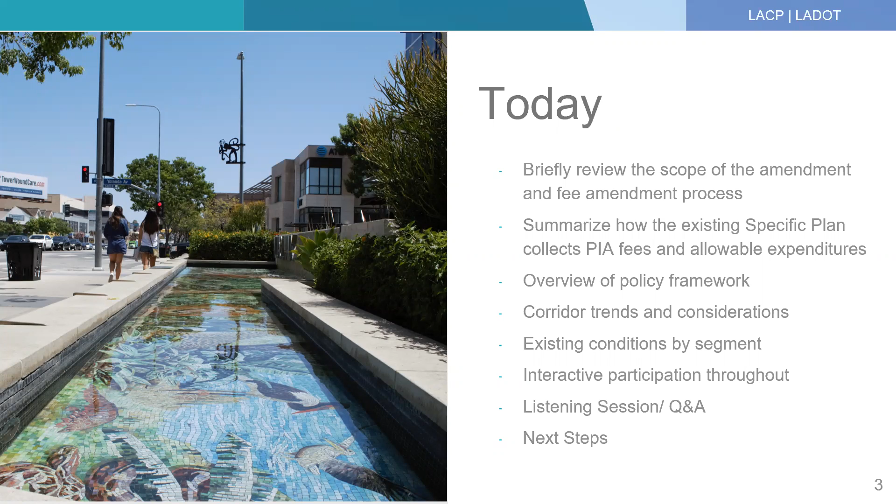The purpose of the meeting is to see what you, the community, wants us to consider for allowed expenditures for updating a fee that's collected in the specific plan area. We're at the part of our work program where we're getting feedback from you, the public, to help inform how the project impact assessment fees should change. We're discussing the proposed changes that you would like to see and listening to you.

The rezoning portion has moved to the community plan update. As of August 2021, in order to speed the corridor's post-pandemic recovery, we delegated the rezoning portion of the work program to the community plan updates already underway in the Southeast and Southwest Valley. This approach will use the city's resources more effectively and support community by community zoning that respects each neighborhood's priorities and allows for the zoning standards to change as appropriate.

The third part, to discuss the project impact assessment fees, is what brought us here today.

Before we go into further detail about what this update means, though, we want to provide quick clarification about how the collected fees apply in the corridor today.

We need to distinguish the difference between the public right-of-way in contrast to individual lots. The right-of-way includes the sidewalk, street, curbs, and gutters, all the land that is public and a common good. In contrast, individual and mostly privately owned lots that line the corridor is where most of the development occurs.

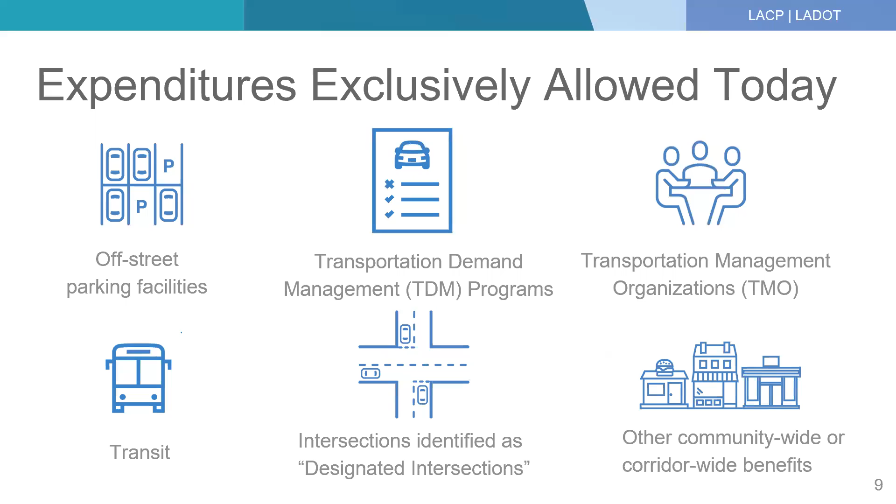There's an option to put the money towards other things with an involved process, but the really big expense has been intersection improvements. There were 19 identified intersections, and 12 and a portion of another have already met the improvement.

These are some of the most clearly defined because transportation demand management and transportation management organizations were not well defined, and therefore that's where most of the money went.

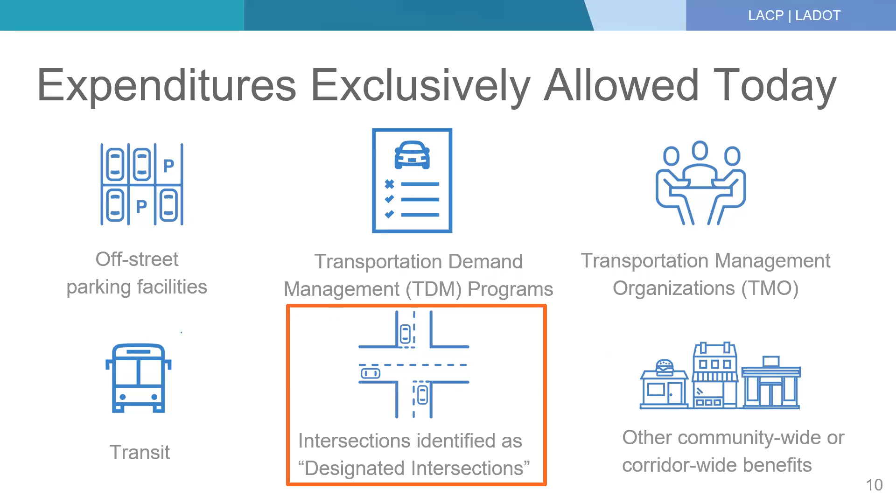But before we start sharing the data we've gathered, we're going to talk for a moment about some guiding policies. We're going to share some things in the existing specific plan. We're also going to discuss how things have changed policy-wise since the adoption of the plan in 1991.

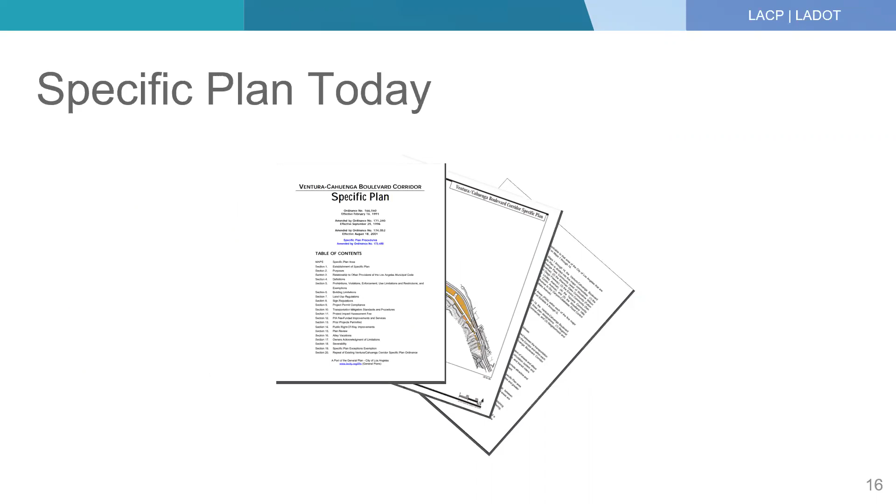We're going to highlight some of the language in the purposes section of the specific plan. Some of these highlighted purposes, as old as they are, still align with the policy direction of today, which we'll discuss in a minute. Of note, though, some of these purposes, while well-intentioned, never fully addressed the specific plan, nor were they adequately funded.

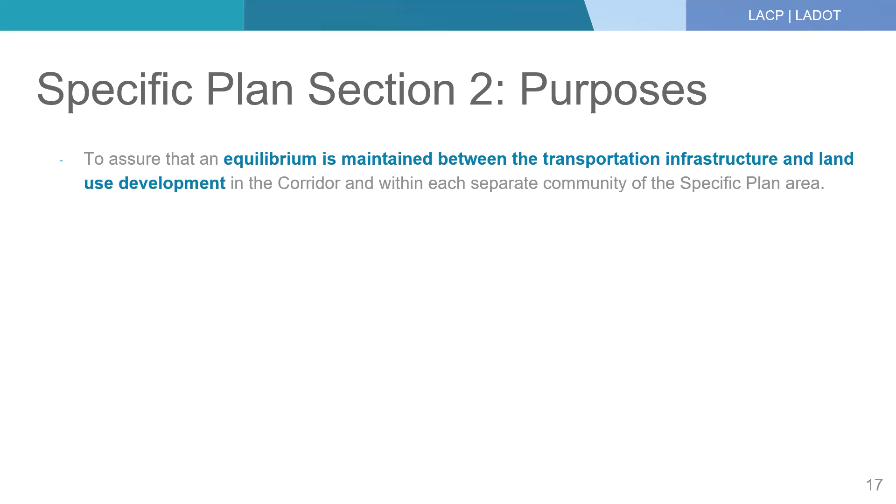The purposes of the plan talk about transportation infrastructure, effective circulation that reduces conflict with motorists, creating attractive pedestrian environments that encourage pedestrian activity and reduce traffic congestion, encouraging pedestrian activity with attractive and active environments, and even alleys because they're part of the transportation system.

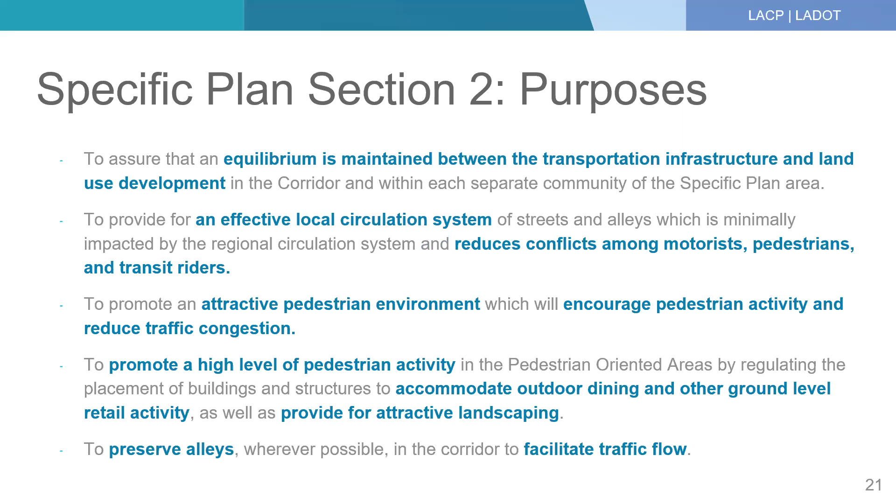However, since 1991, many other things have also changed. We're going to start with some citywide ones. A few years ago, we updated our mobility element, which was formerly known as a transportation element. We did this because we updated our approach to transportation. We started to think about mobility for all users.

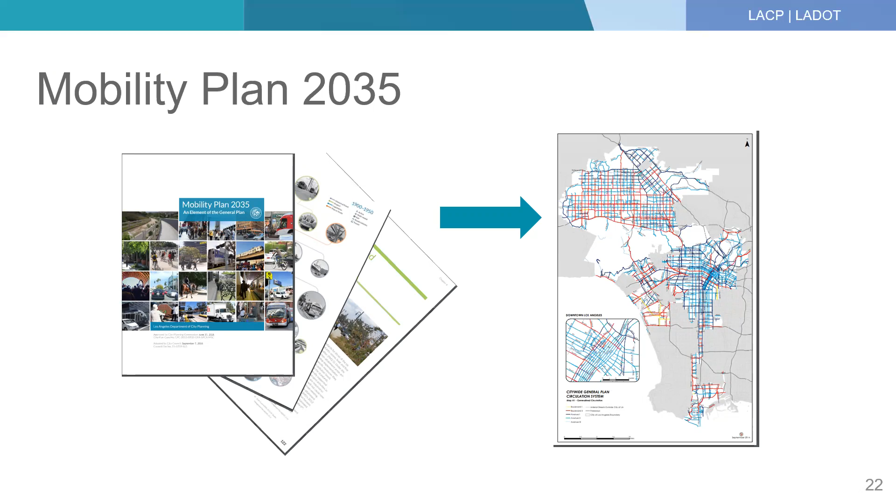In the 2035 mobility plan here, you can see a snapshot of the mobility circulation system map. The entire Ventura-Cahuenga corridor is designated Boulevard 2 in the mobility plan, and this designation provides standards for the width of the streets and sidewalks.

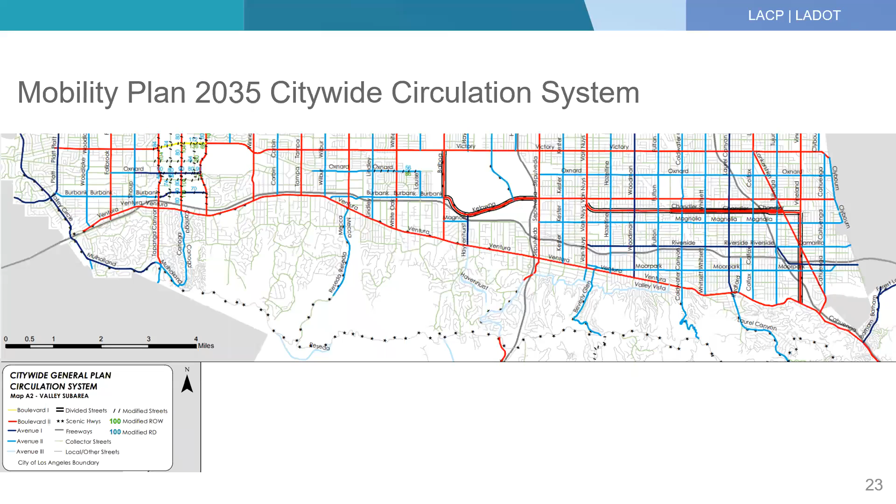The shift from auto orientation is also in part because we started thinking about the cost of accidents in vulnerable populations. On average, 36,000 or more Angelenos are killed or injured in motor vehicle collisions per year. That's about 100 per day. And the fatality rate is doubly high for our youngest and oldest residents.

Vision Zero is an international movement that tries to prevent the loss of life. In August 2015, Mayor Garcetti launched a local Vision Zero initiative by issuing an executive order that makes human life the top priority in the design of our city streets. The executive directive includes two specific goals: to reduce citywide traffic deaths by 20% and to ultimately eliminate traffic deaths citywide.

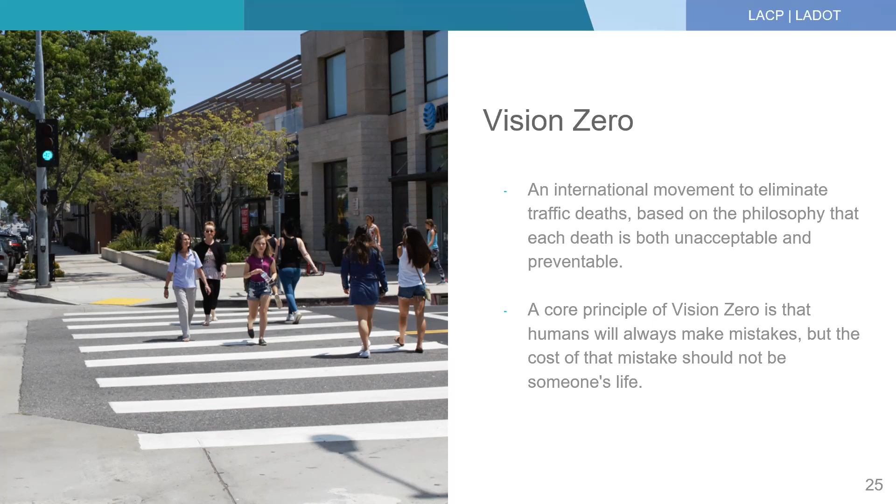As a result, there's been an extensive safety study that's been done to better understand collisions on our streets. This safety study informed our Vision Zero action plan.

The statistics from Vision Zero note that children, older adults, and people who walk and ride bikes are at greatest risk for collisions that result in severe injury or death. In Los Angeles, people walking and bicycling are involved in only 14% of all collisions, but they account for almost half of all traffic deaths. As a result, Vision Zero Los Angeles is trying to change things to protect those most vulnerable on our streets.

We can see the outcomes of these collisions in this map of traffic fatalities. As you can see, the majority of the Ventura-Cahuenga corridor is indicated in red, which notes that it is a segment on the high injury network.

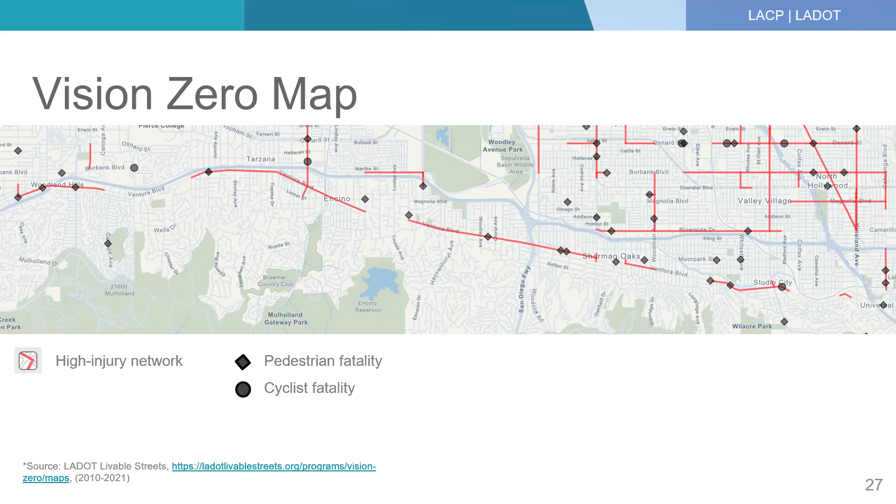Every diamond on this map represents a pedestrian fatality by auto accident. Every gray circle represents a cyclist fatality by auto accident. And every square represents a car passenger or driver who passed away in a traffic crash since 2010. If you notice the color around the shape, that's an accident where people have provided names to these fatalities, reminding us these shapes represent lives lost and aren't just statistics.

We're going to take a brief moment here to pause and honor the memory of all those who've lost their lives.

If you know someone who is the victim of a traffic fatality, you can email visionzero@lacity.org to help create a digital memorial. Keep in mind, this map does not include crashes where all the persons involved survived with injuries.

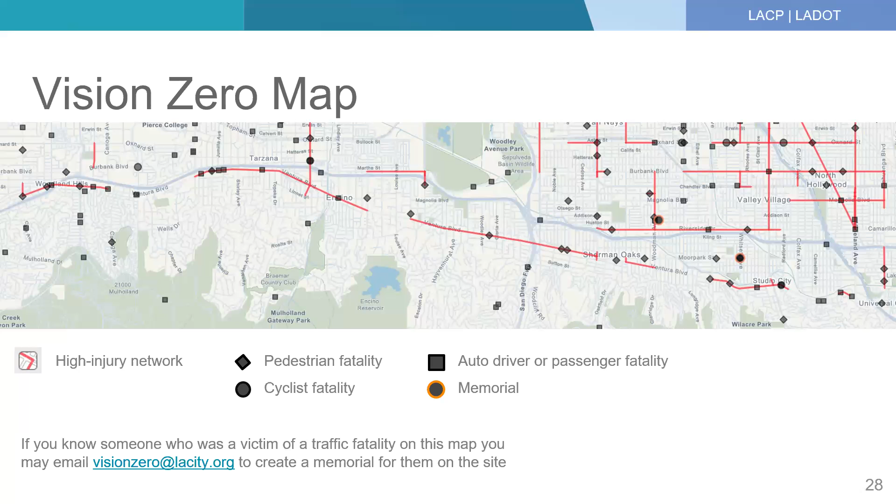Moving on from this sobering last couple of slides, the state of California also changed their methodology for traffic. They moved from a level of service, or LOS, congestion traffic analysis model, to one called vehicle miles traveled, or VMT, which looks at the act of driving. The state required every jurisdiction to move to this methodology by July of 2020, and the city adopted the approach in July of 2019. The methodology focuses on the act of driving rather than congestion as a measure of environmental impacts, to help focus on greenhouse gas emissions rather than the inconvenience of time to travel between destinations.

What's important to note here is that the project impact assessment fees were based off of the LOS model before, but because we can't just adjust how we spend an existing fund, we have to adopt the new fees based on the new VMT model.

So why are we looking at autos in terms of greenhouse gas emissions? It's because today, half of California's greenhouse gas emissions are generated from the transportation sector. California adopted this standard because it can achieve long-term climate goals through a reduction in VMT per capita. Ultimately, lower VMT will reduce regional greenhouse gas emissions.

One of the main strategies in this VMT model is to look at travel behavior. Transportation demand management looks at providing tools other than auto travel to manage transportation demands, or in other words, how people want to travel from point A to point B.

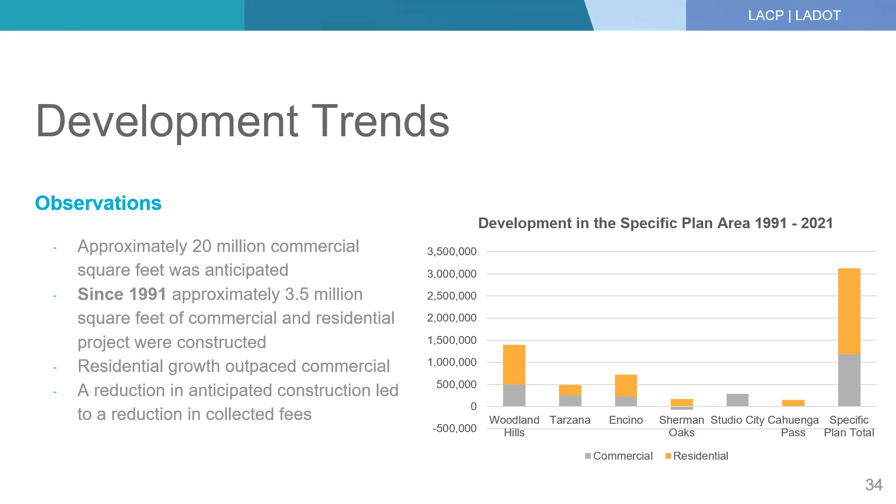At a higher level, looking at market trends, though, we notice a few other things. The specific plan area actually has more office space than retail space, but over the last decade, very little office space was added except for medical offices. Some of you may know this, but the medical industry is a very fast-growing industry today.

As I said, there's generally more office space than retail on a per square foot basis in the plan area. However, in our pedestrian-oriented areas, the opposite is true, where retail is 70% of the pedestrian-oriented area commercial inventory by square footage, and food and beverage establishments by number are the most common type of business in those areas.

Grocery stores have been the most common type of retail product in the plan area, and over the last decade, more retail space has been added, but mainly in grocery stores. Two-thirds of this was added to the eastern segment in Sherman Oaks alone.

Housing is the most common type of construction in the plan area. 60% of it has been residential. And one more thing to note, commute patterns generally travel east to west or west to east, except for the arterials that connect north and south for freeways or other connections. The exception to this is in Sherman Oaks, where the 405 and Sepulveda intersect. The regional center nature of that area is different.

The greater context for some of what we're about to discuss relates to the data we got from our consultants. Keep in mind, the data we're going to share is preliminary, and the information we're sharing is only from a few of the studies we're conducting for the specific plan amendment. We're going to highlight that we had our consultants provide data on sidewalks and parking in the corridor because both of these provide access for businesses, residents, and patrons of the boulevard.

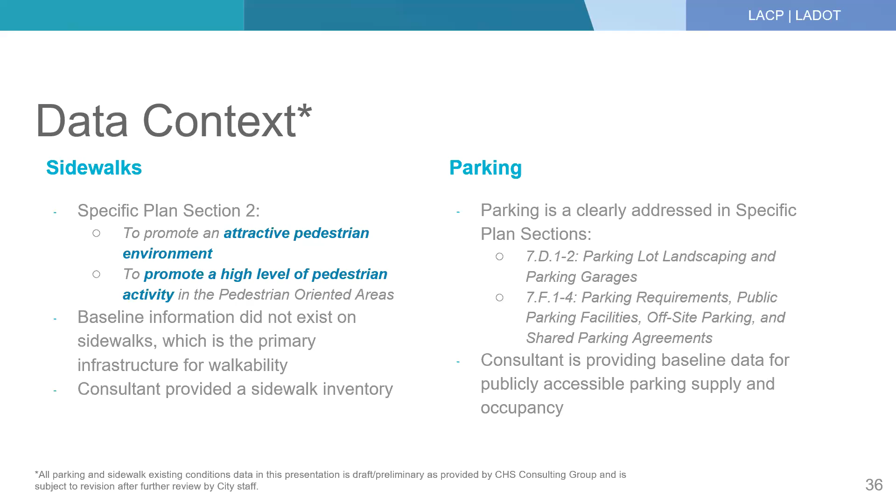Okay, thank you very much. So we're going to move on to present the parking data and the sidewalk data that we've collected so far.

We divided the 17-mile corridor into the western and eastern segments because conditions are significantly different along the corridor east and west of the 405 freeway. This aligns with the community plan boundaries as well. We are only providing preliminary data gathered for sidewalks and on-street parking today.

We begin with the western segment, which starts at the Arroyo Calabasas and ends at the 405. Our consultant collected data along the entire corridor and divided the western segment into a total of 8 sub-areas. 3 of these sub-areas, shown here in dark green, were originally designated as pedestrian-oriented areas, or POAs, by the Adopted Specific Plan.

to create a more pedestrian-friendly environment in the commercial cores of these communities. In the interest of time, we'll be focusing on the 3 POAs, starting with Woodland Hills and moving east to Tarzana and Encino. Before we start, we'll walk through a few images to ground ourselves along the western segment and the general conditions of the right-of-way. The red stars here indicate the locations of the pictures in the following slides.

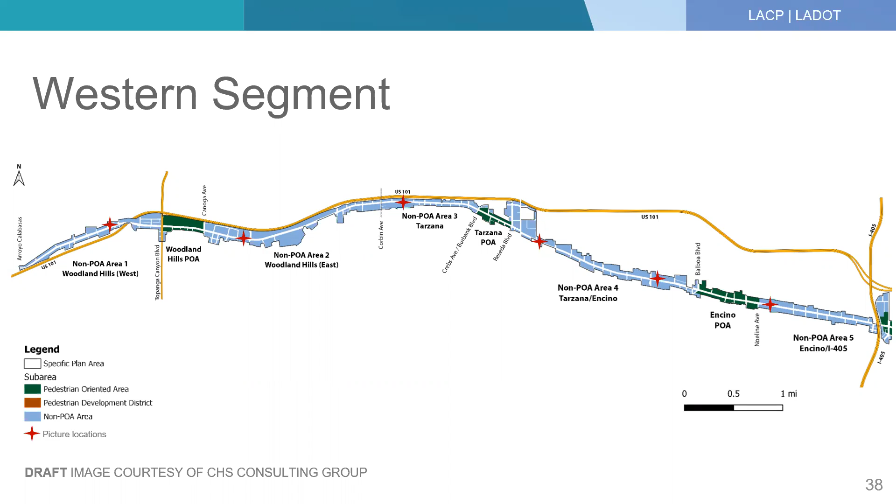This image was taken from the center of the right-of-way facing west toward Ponce Avenue, where Ventura is at least 90 feet wide, accommodates 7 lanes of traffic, and provides on-street parking on either side. Here we are once again at the center of the right-of-way, this time facing west toward Peralta Avenue, where the street narrows to a maximum of 80 feet in width and minus 1 lane of traffic.

This is Shirley and Ventura. As a general trend, the right-of-way narrows as we move east on Ventura.

This picture was taken at Ventura and Nestle, where the Encino Tarzana Library is located, and high visibility crosswalks are present at this intersection.

This is Plaza de Oro at Encino Commons, where a mid-block signal crossing with a landscape median complements the arch to create a destination and sense of place. As stated earlier, these infrastructure improvements are not enabled in the current specific plan.

Here we see the relatively recent sidewalk improvements that were completed in conjunction with new development at Libbit and Ventura.

The west side is developing faster than the east by a large margin, with 80% of all development that has happened in the plan area since the adoption of the plan. In fact, over the past decade, 3/4 of all new multifamily along the corridor has developed in Woodland Hills, while Tarzana added most of the new office space, primarily medical.

Most of Ventura is 71 to 80 feet wide along this segment, and at its widest is more than 90 feet wide near the 101 freeway in Woodland Hills.

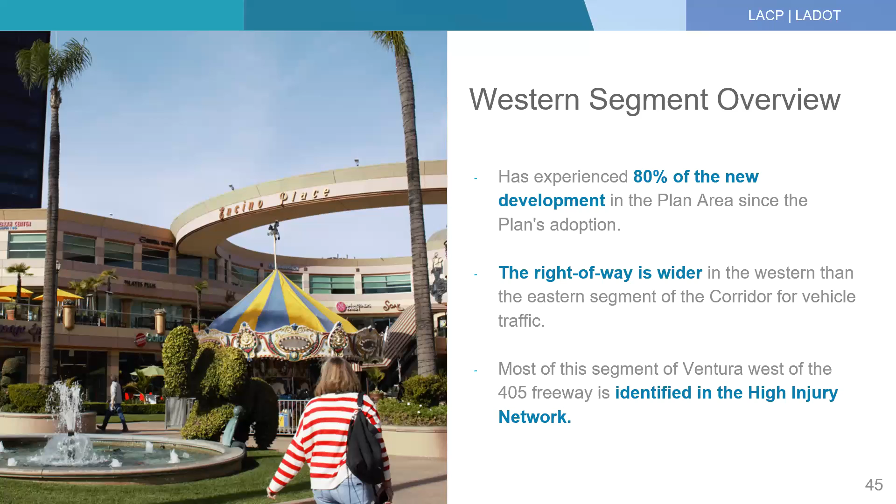Now we move on to the parking inventory. On-street parking is the most visible and publicly accessible, but it is limited by the space on the curb. With a clear picture of the parking supply and demand along the corridor, we can identify parking management strategies that will benefit visitors and businesses alike, while also reducing greenhouse gas emissions and congestion caused by searching for parking.

For the western segment, we have 1,700 spaces on the curb, 85% of which are already metered. For each area, the consultant mapped occupancy rates using standard methodology approved by LADOT staff. In all the following maps, you will only see occupancy rates using metered data provided by LADOT. To clarify, these numbers are pre-pandemic and reflect what we refer to as normal parking trends.

The specific plan as it is written today does not explicitly allow spending PIA funds for improving on-street parking, only off-street parking lots and structures. In order to allow on-street parking expenditures, the current plan requires a relatively intense and difficult process.

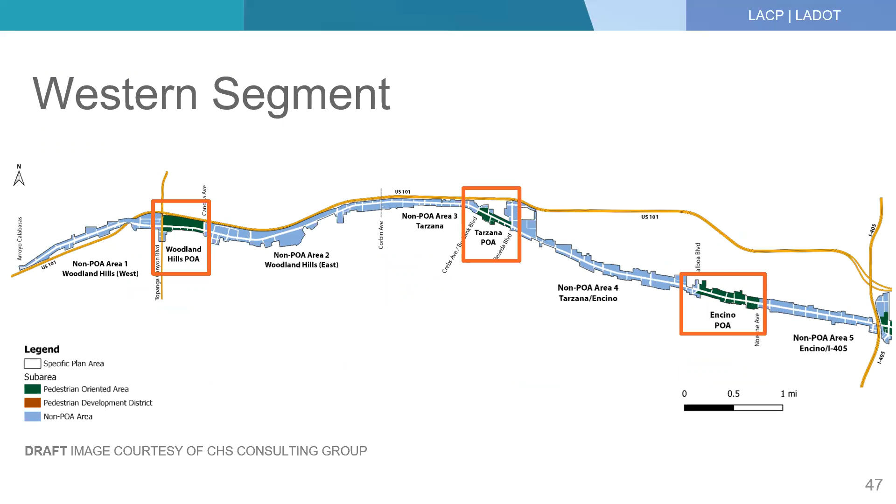As a reminder, in the interest of time, we will only focus on the pedestrian-oriented areas for our presentation today. In all maps, the POA is indicated with a darker gray. The map you see before you is the Woodland Hills POA located south of the 101 freeway and bound by Topanga Canyon to the west and Canoga to the east.

On all parking maps, we want to emphasize that block faces showing in purple or black experience the highest measured occupancy for at least 1 hour a day. Most of the block faces in this POA are shown with green lines because they are below 70% occupancy. The only block face shown in purple is between Baza and De Roja on the southern side of Ventura.

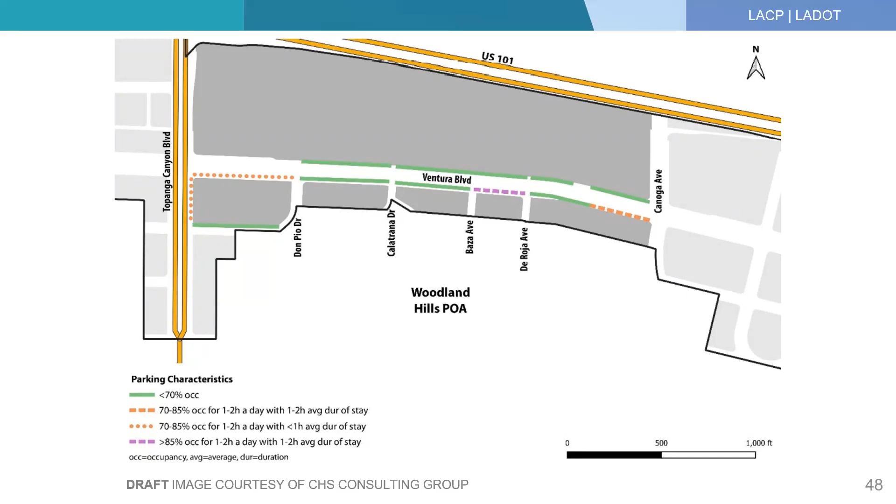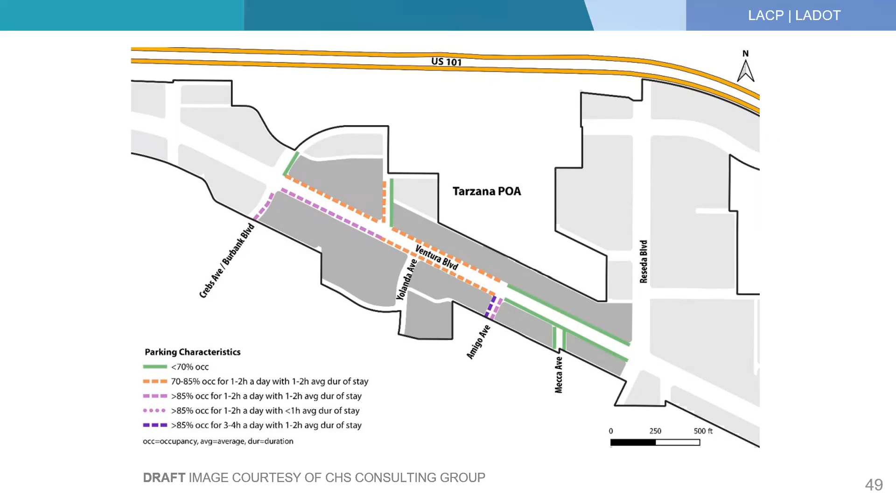The Tarzana POA is located between Burbank and Reseda. Here, the highest occupancy rates are clustered between Burbank and Amigo, with most of the purple along the southeast corner block at Burbank and Ventura. The orange is more frequent here and indicates the mid-range occupancy of 70 to 85%.

The Encino POA is located between Balboa and Noeline. Here, the highest occupancy rates are clustered between Rubio and Noeline, with some higher occupancy rates at La Maida. Notably, the blocks between La Maida and Rubio are at the lowest occupancy rate.

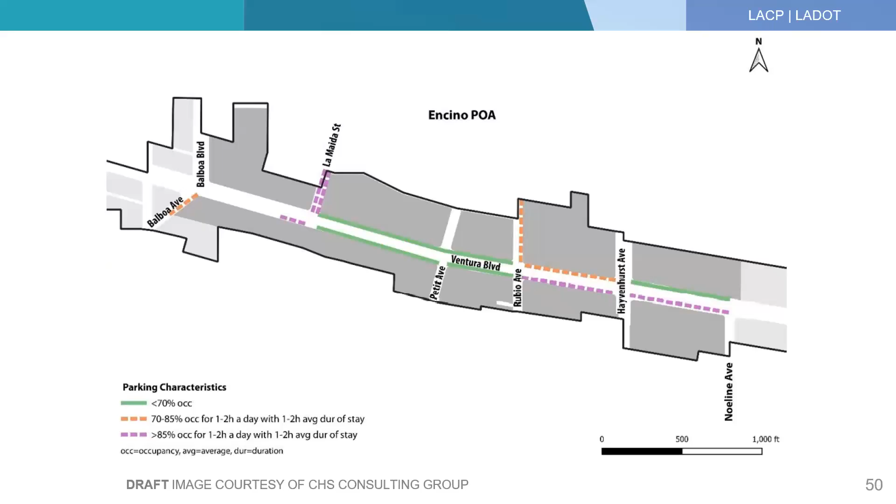Now we move on to the conditions of the sidewalk, the most vital infrastructure for a pleasant and safe pedestrian environment. Our consultant provided a sidewalk report that inventoried sidewalk widths and categorized them as suboptimal and missing. Suboptimal meaning sidewalks that are less than 9 feet wide, because 9 feet is considered the standard minimum width to accommodate all the competing uses of the sidewalk.

Missing sidewalks includes both completely missing or simply unpaved. Additionally, observations indicated where there are missing curb ramps at crosswalks, provided a tree count distinguishing between shade and non-shade trees, and provided additional observations of other obstacles for pedestrians.

This is all preliminary data that has not been finalized yet. Also, while we trust that our consultant has done a thorough inventory and provided reliable data, we value community observations that may help us identify any missing data that may not be captured in this draft.

Once again, we will focus our overview today on the pedestrian subareas as we did with the parking, but additional data and observations were collected along the corridor segments in between as well.

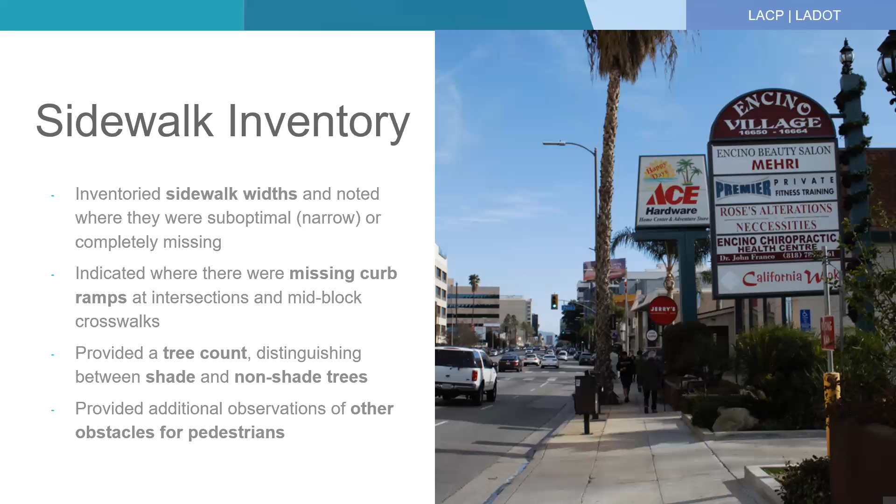For the Woodland Hills POA, the consultant found 7 suboptimal sidewalks, no sidewalks were missing, and ramps were present at all crosswalks. The tree count indicates that most trees in this POA are shade trees, but on average, only 1 tree was found for every 100 feet of sidewalk.

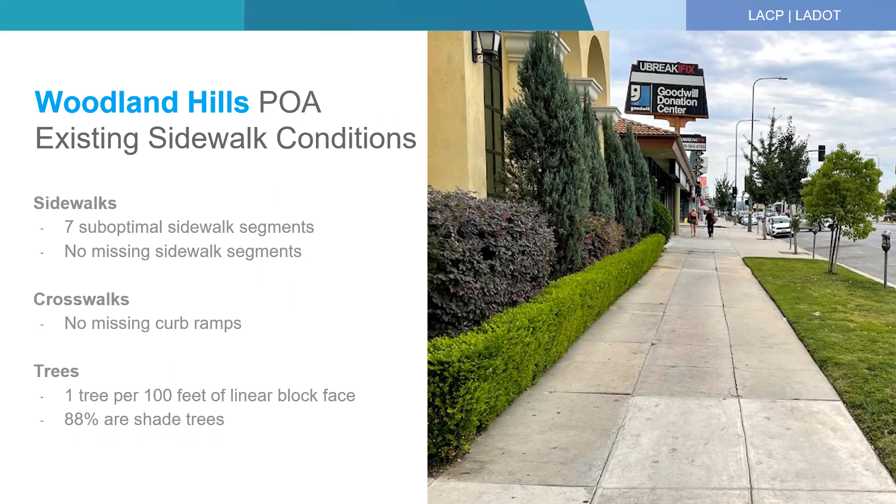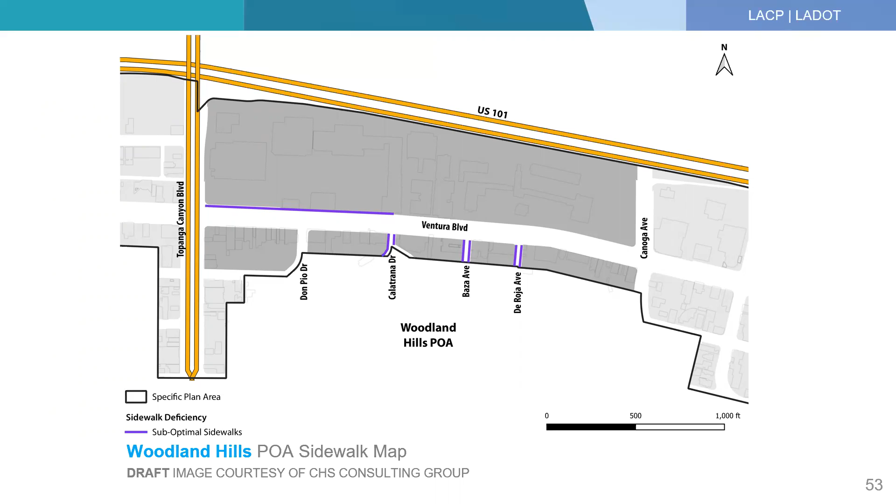They found landscape parkways along wide sidewalks, awnings with poles that add to the obstacles on the sidewalk, bus stops with insufficient space to serve both transit riders and pedestrians walking through, merchandising displays that encroach on the sidewalk, outdoor dining up to the property line, and in some cases beyond the property line and practically enclosed, and finally, curb ramps that were not yet updated to today's ADA standards.

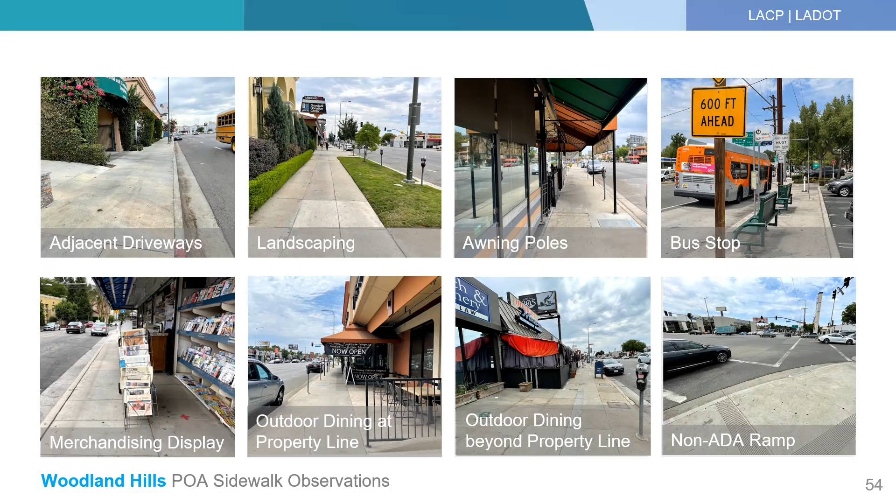Now we move on east to the Tarzana POA, where the consultant found only 1 suboptimal sidewalk and no missing curb ramps. The tree conditions are similar here to Woodland Hills in that most are shade trees, but they are not very frequent as you walk along.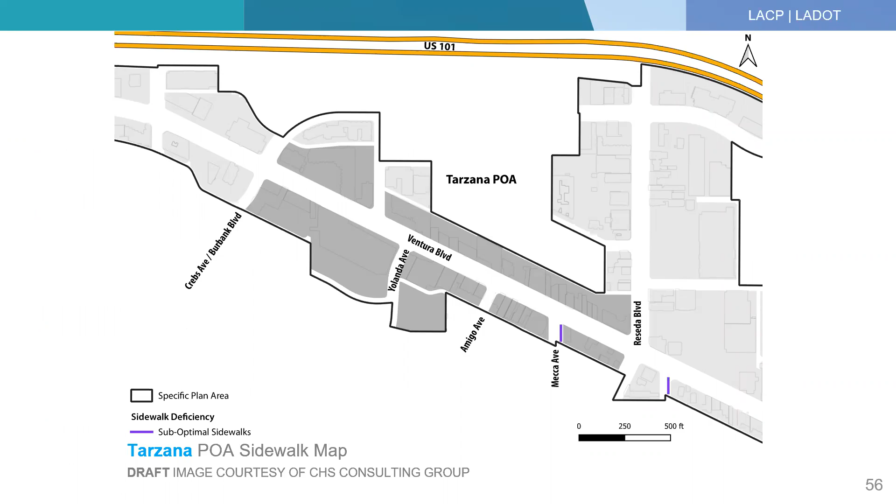In Tarzana, the consultant found cases where planters were placed at the frontage and beyond the property line. Outdoor dining appears here again, but notably there is a distinction between small temporary furniture adjacent to the frontage and enclosed dining beyond the property line that further reduces the walkable area that is already too narrow.

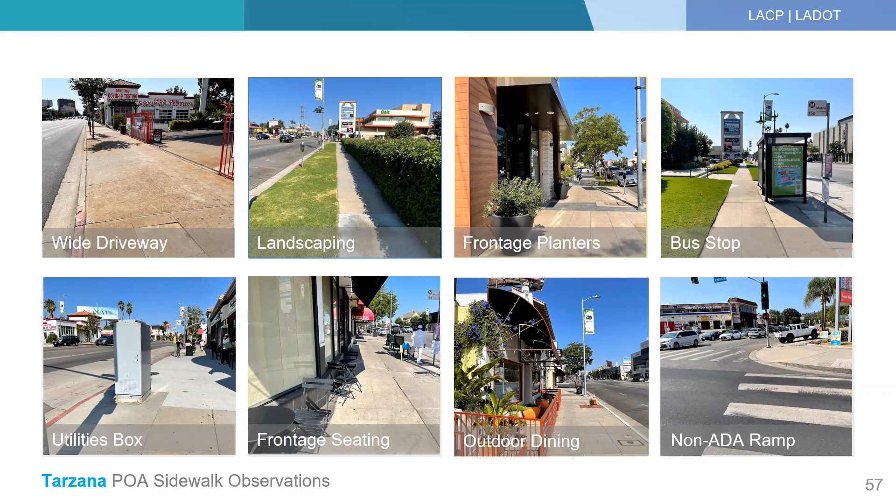On a positive note, we see an example of a bus stop at Burbank with a shelter that still allows enough space for pedestrians to pass.

For the Encino POA, the consultant found 4 suboptimal sidewalks and 1 missing sidewalk. No ramps were observed missing where they should exist, and among trees observed, tree frequency begins to increase here to 1.6 per 100 feet of sidewalk. The shade tree proportion decreases to 65%.

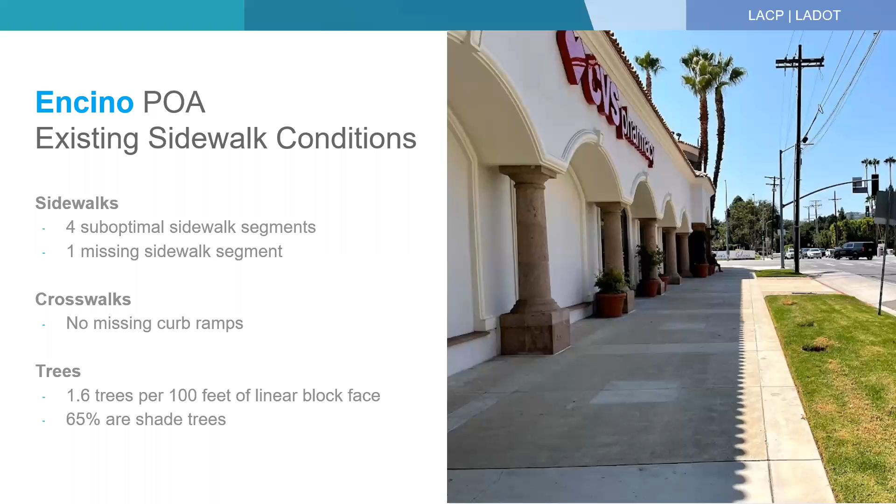The map on your screen shows the suboptimal sidewalks are found on both the north and south sides of Ventura near Balboa. All other suboptimal sidewalks are found south of Ventura at smaller cross streets, and Noeline Avenue is the only street with a missing sidewalk.

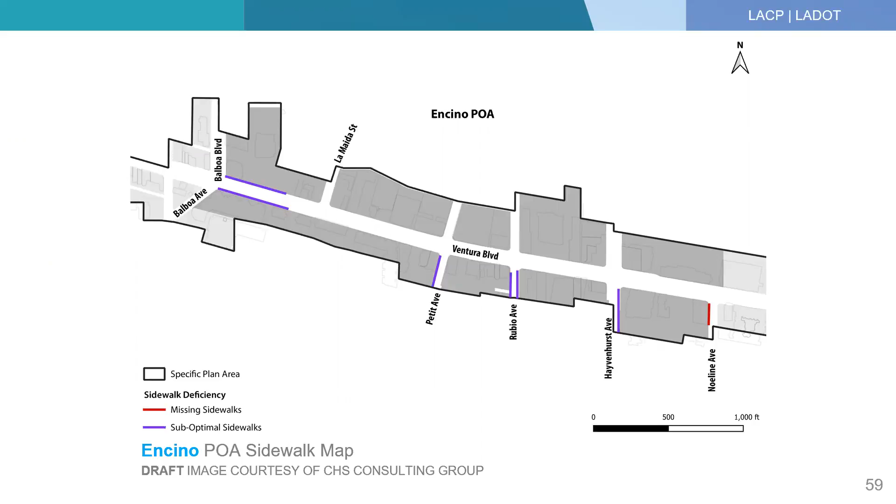On this slide, the bottom left is the missing sidewalk at Noeline. The observations also highlight that in some cases, trees are missing tree well covers, which reduces the paved path for pedestrians. In other cases, where there are trees and ample space, the trees themselves do not provide shade. Ideally, you would have a shade tree with a tree cover in place while still allowing enough space for pedestrians.

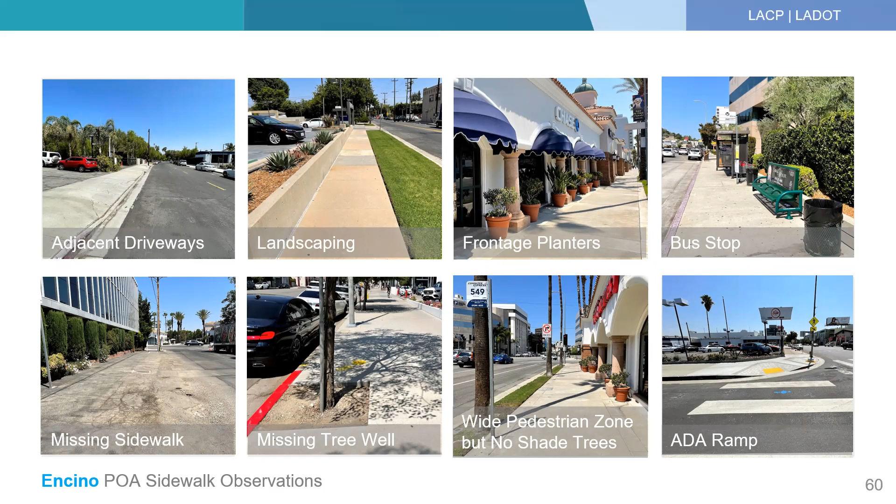On a positive note, the consultant found and observed areas with awnings and planters that could be present while still allowing enough space for pedestrians, and newly updated ramps like the one on the bottom right.

Now we move on to the eastern segment. In this case, we start at the 405 and continue to the end of the corridor in Cahuenga Pass, just beyond Barham Boulevard. For this segment, the consultant divided the corridor into 5 sub-areas.

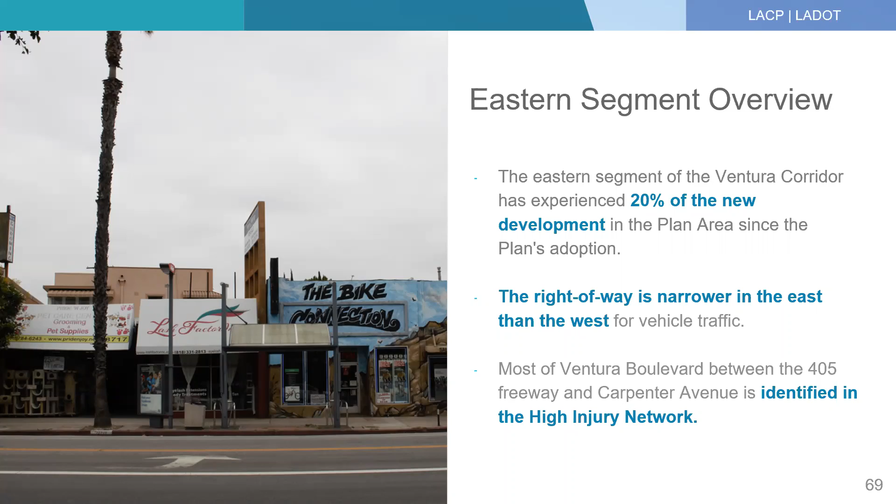For the eastern segment, there are almost 1,900 spaces on the curb, roughly 90% of which are metered. We will review the occupancy data up next as we did with the western segment, highlighting the pedestrian sub-areas.

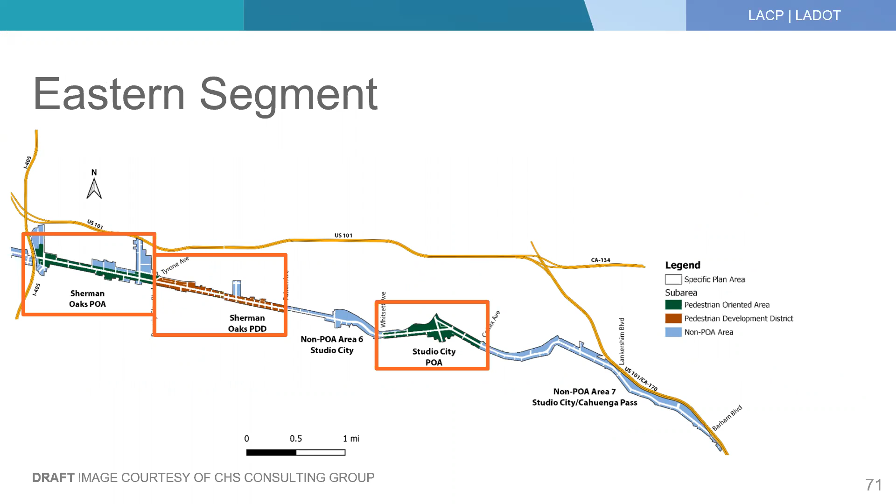Here are the pedestrian sub-areas which only exist in Sherman Oaks and Studio City per the original plan. Starting with the Sherman Oaks POA, most of the higher occupancy exists between Columbus and Kester, and then Willis and Beverly to the east.

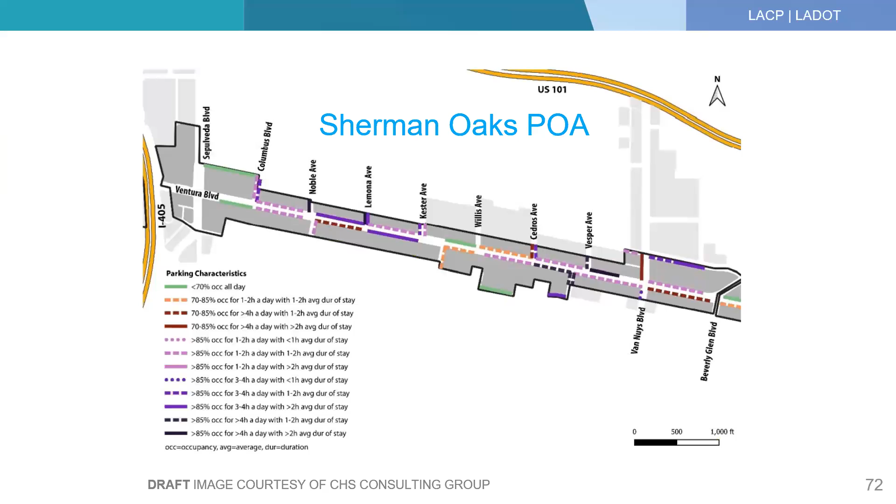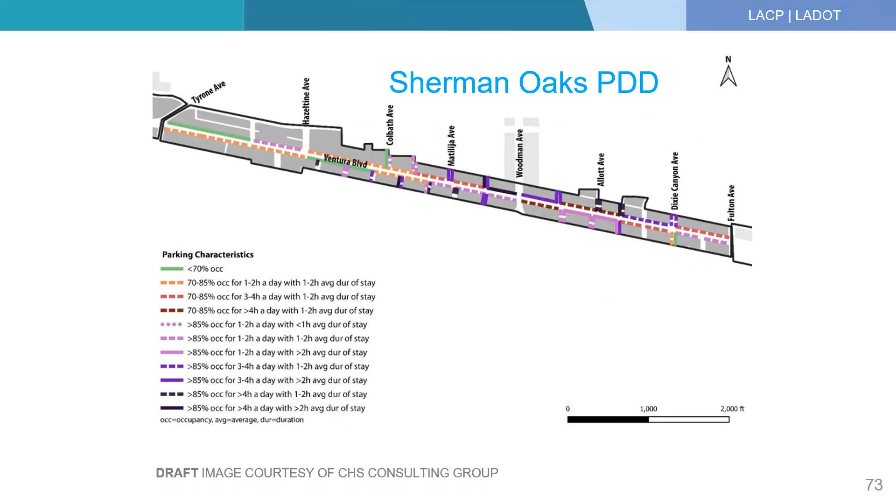The 4 suboptimal sidewalks are clustered near the Sepulveda intersection. The missing sidewalk is near Tyrone Avenue, and the yellow triangles indicate the 6 locations where curb ramps are missing.

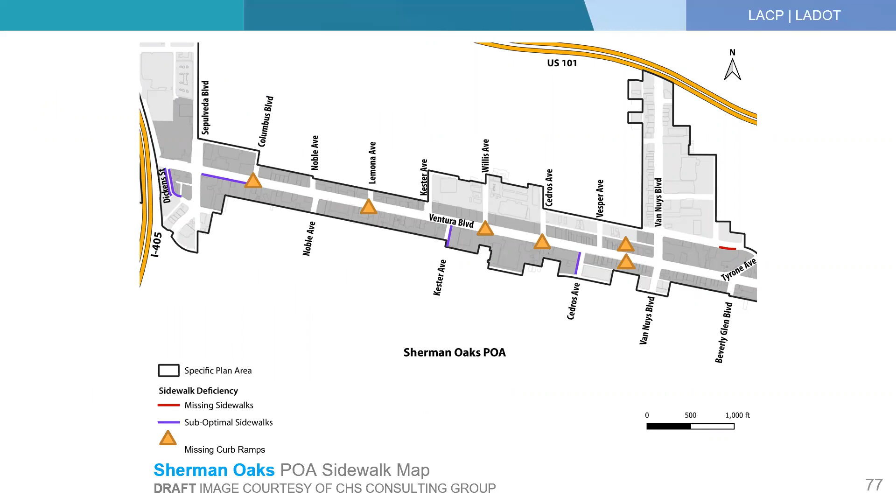Now we move on to the adjacent Sherman Oaks Pedestrian Development District, where the consultant found 4 suboptimal sidewalks, 3 missing sidewalks, and 1 missing curb ramp.

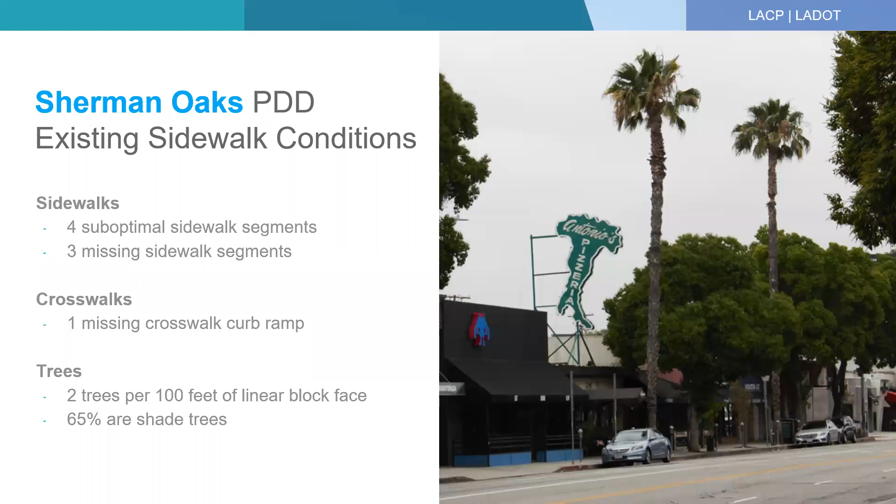The trees slightly increased in frequency to 2 per 100 feet and to 65% shade trees. The missing sidewalk segments are near Tyrone, and most suboptimal sidewalks are near Woodman. The missing curb ramp is at Allott Avenue.

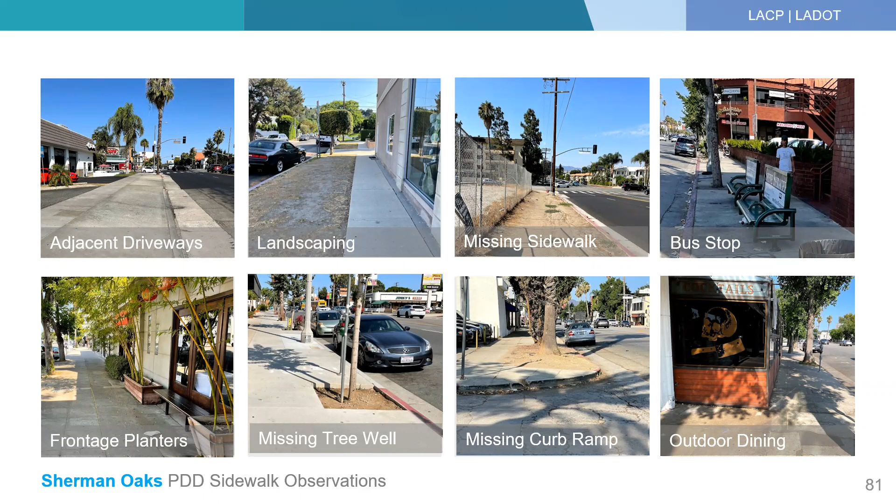This area's observable conditions are not all that different from the previous area. One observation to note, as shown in the bottom left, are the frontage planters and missing tree wells that sometimes reduce the walkable path for pedestrians on the sidewalk.

To compare, the highest tree frequency in the western segment was 1.6 trees per 100 feet, and the lowest shade tree percentage was 65%. Therefore, we find that while tree count may increase as we move east, the shade provided by those trees diminishes.

The 6 suboptimal sidewalks are shown here, and as you can see, the longest segments are along Laurel Canyon Boulevard. The missing sidewalk near Whitsett Avenue that peeks into the map is just beyond the boundaries of this POA.

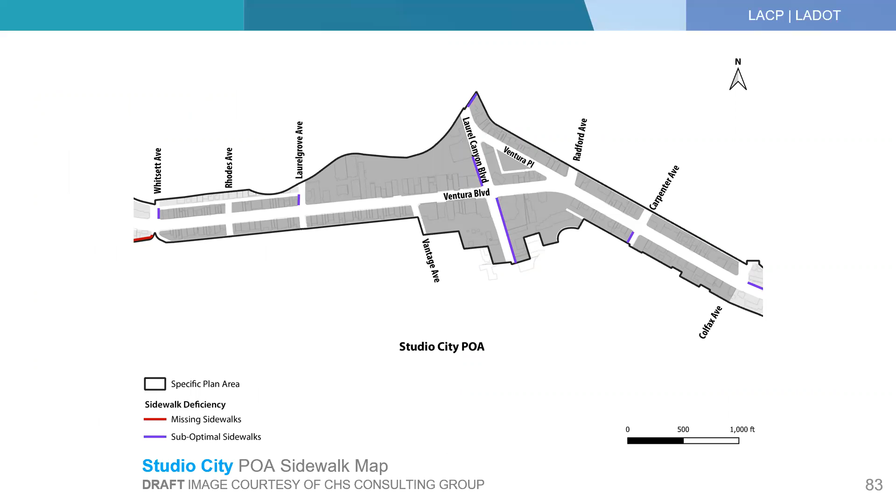The Studio City POA has some of the same issues as the prior POAs, but I will highlight particularly poor or unique observations from this area.

As we analyze these observations, we want to recognize there are many sidewalks where there simply is not enough space for all amenities to be present, and priorities will likely be different by segment and community.

We are presenting observations and data as it becomes available, but we will need your input to identify priorities for improvements as we move forward.

Now we'll move over to the scope and legal requirements of our work program to clarify what is legally permissible for our work program today.

This fee update must comply with some state legal requirements. In particular, the Mitigation Fee Act is a California law that regulates how a local agency, such as City of LA, can establish, increase, or impose various fees. The Act also outlines requirements for what fees can be set, how monies can be spent on what types of expenditures, as well as the process to approve fees.